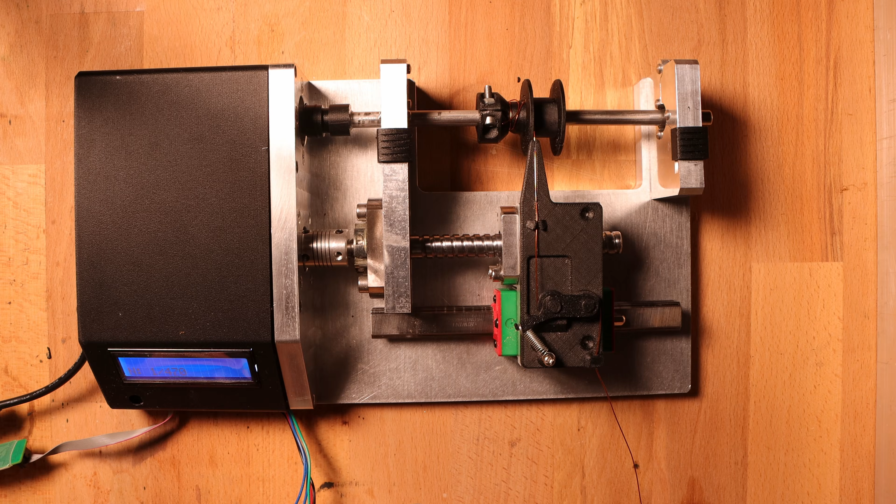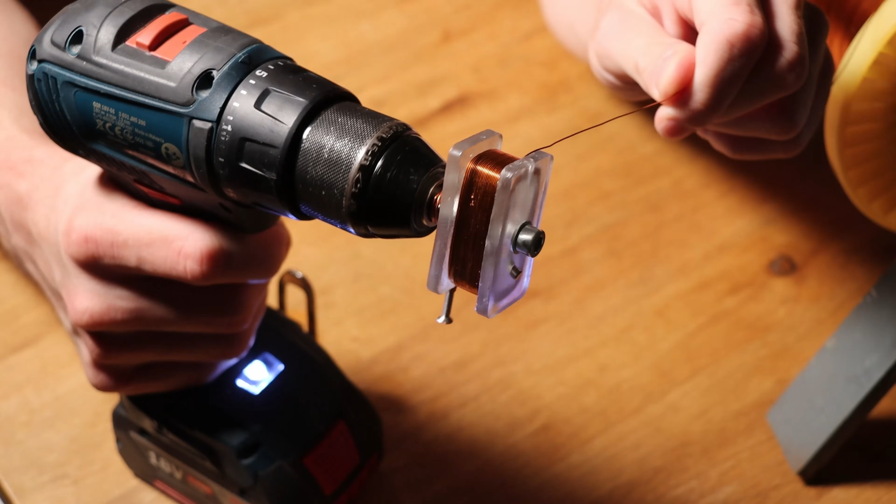I need coils. Not one, not two, many of them. For the first linear motor prototype I wound 3 by hand, which I remember as a truly traumatic experience. That really was a pain in the... So I did what any sane engineer would do. I built a machine.

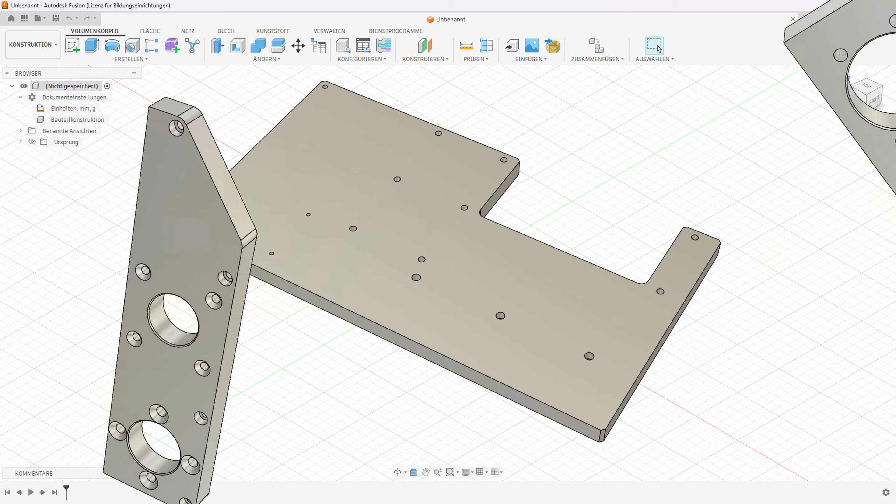As always, every project starts with a concept. A base plate, holders, a spindle, traverse, motors, ball screw, electronics and controls. And eventually, all those individual parts slowly turned into an actual machine. Let's make some chips.

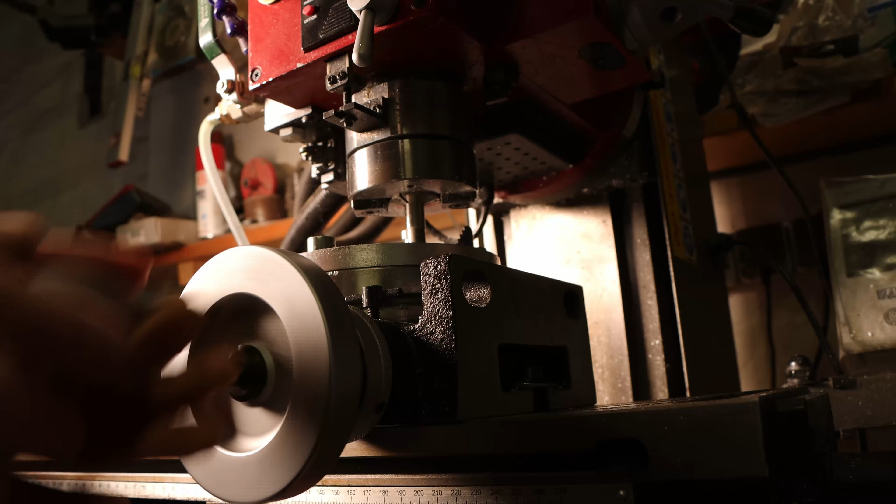But of course, where's the fun in not making chips? Which is slightly less fun when the garage is at -10°C. I decided to machine most of the parts myself, except the base plate and the motor mounts, to push my skills a bit further.

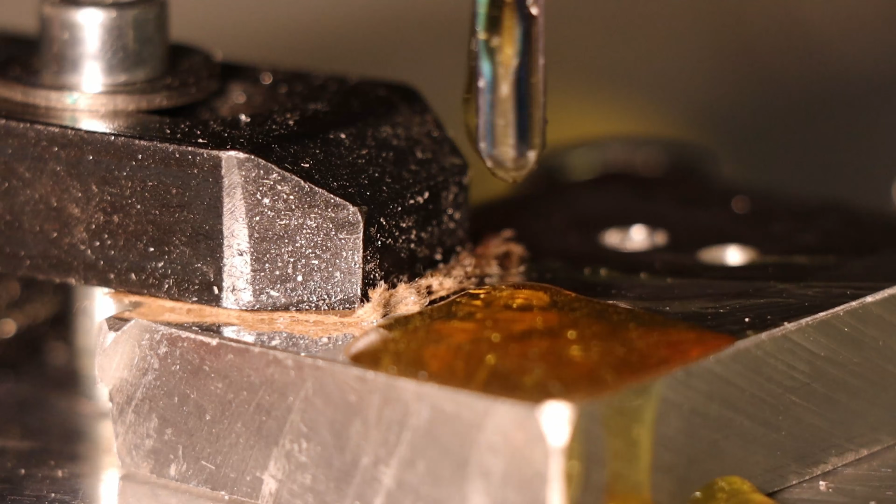Most of these parts are machined on the rotary table, and for this build I decided to make a sacrificial fixture plate. Each part has at least 2 key features, like external radii with a 5mm reamed hole in the center or a large bore. These reamed holes make positioning and flipping parts quick and repeatable. And once a part is done, I just resurface the fixture and move on to the next one. Wait for this shot, this is oddly satisfying.

Alright, first part done, 4 more to go. But first, resurfacing.

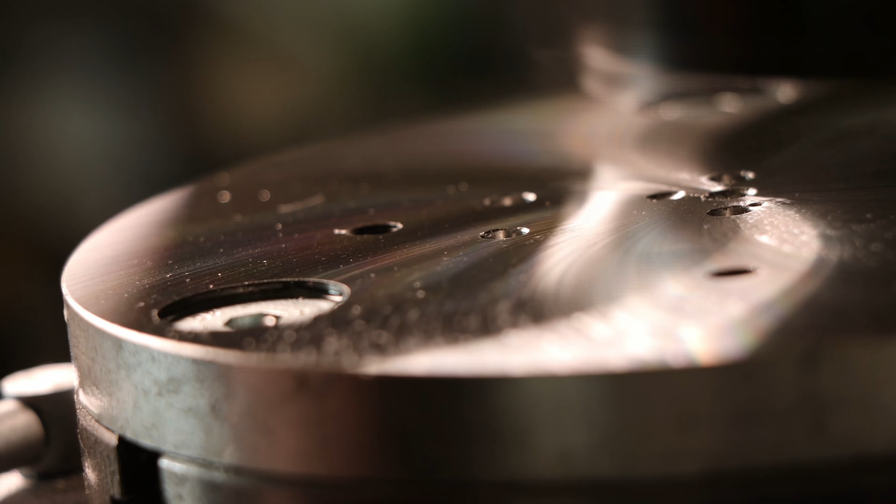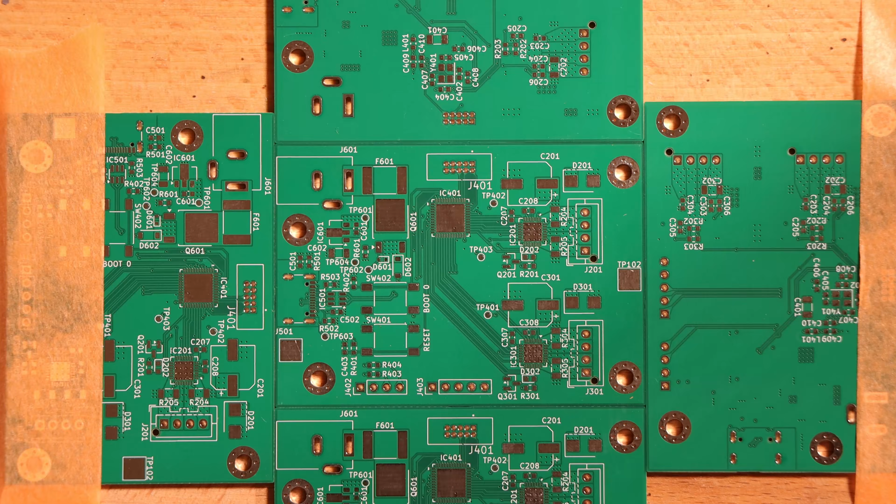Since it's been a while, I decided to design a proper PCB for this project. Via a simple UI, you simply set the parameters for the winding job and hit start. The microcontroller then pre-calculates the speed ramps, couples the traverse to the spindle, and sends the right pulses to the TMC2209 stepper drivers and motors.

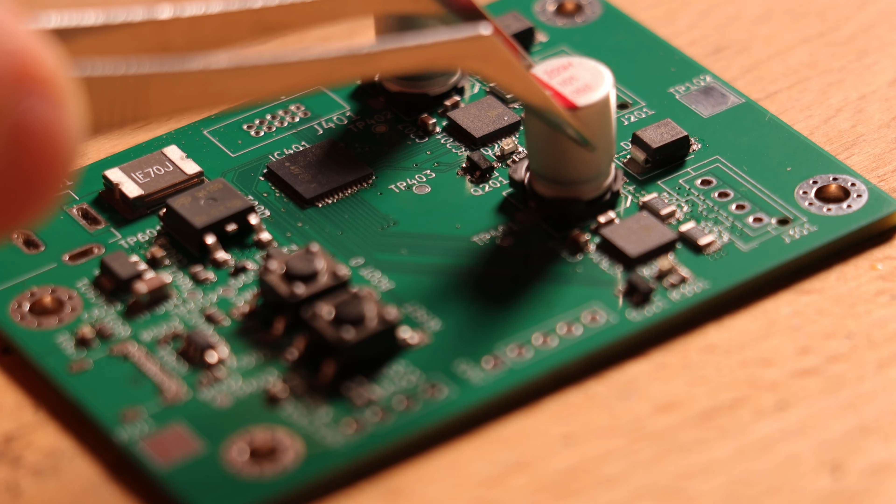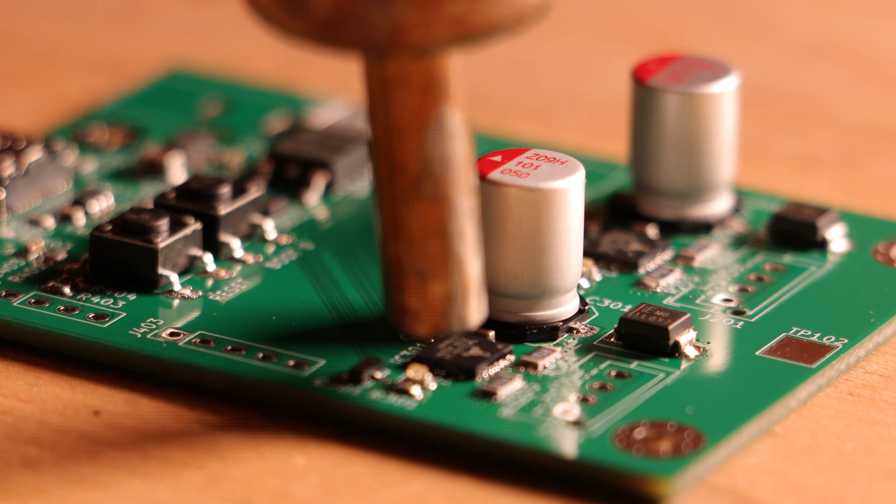Of course, I made some mistakes when designing the circuit board: forgot the USB D+ and one-wire pull-up, didn't debounce the encoder and the button, no test points, and the used controller doesn't feature USB DFU when blank. Besides that, everything works perfectly. Now all of the parts are finished, we can start with the assembly.

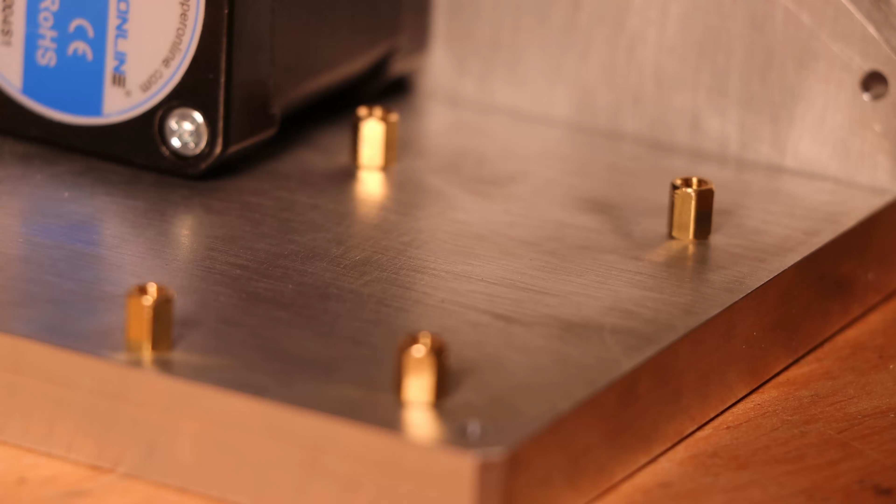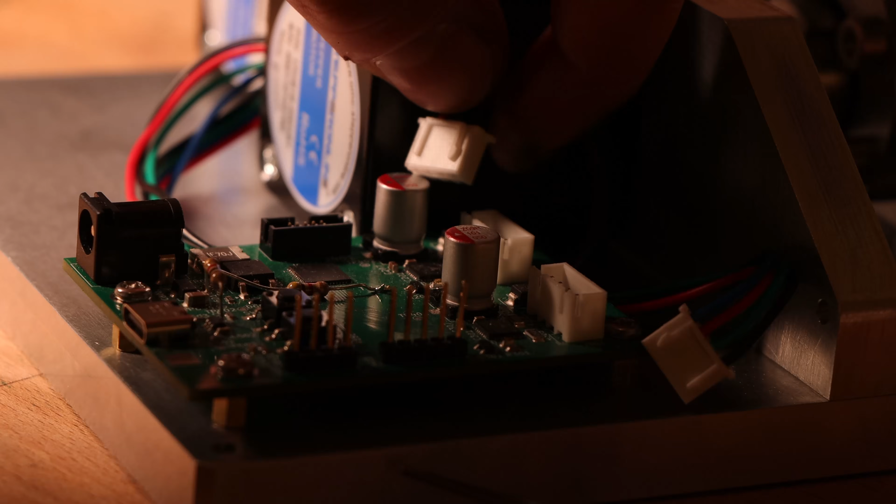Now, we need a program, but before that, we need to know how to wind a spool. Sounds simple enough, but there's a bit we should consider. Most people know helical coils, and if you ever wound one yourself, you know at some point it just goes completely off the rails, no matter how hard you try. According to Wikipedia, this drops the fill factor to about 73%. What we wanna do instead is an orthocyclic winding.

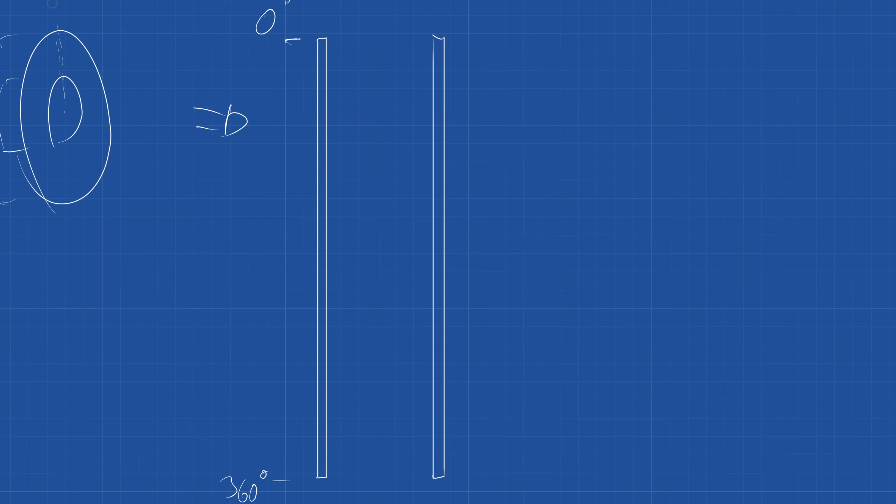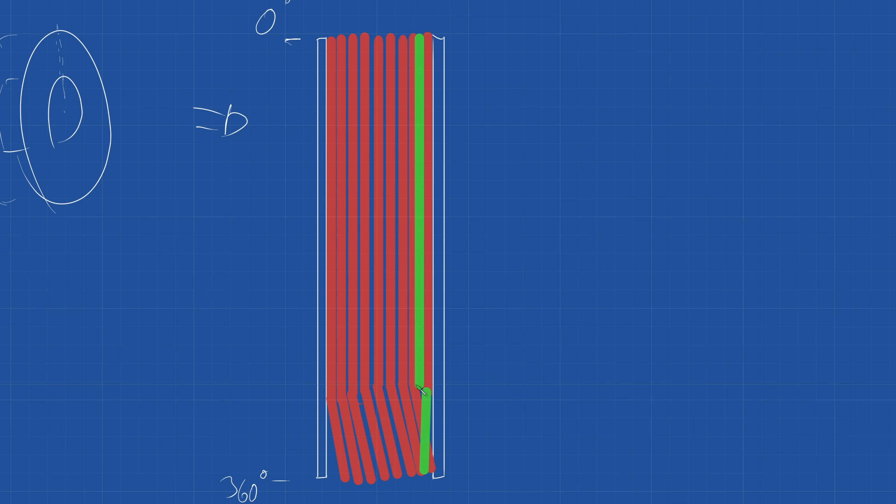Orthocyclic winding. In a section view, it looks like a honeycomb. To understand what is going on here, let's unwrap the winding. Every turn is parallel to the others, no matter which layer or which direction we're winding in. Each turn crosses over only at one transition point. And also in this area, the layers cross, in theory.

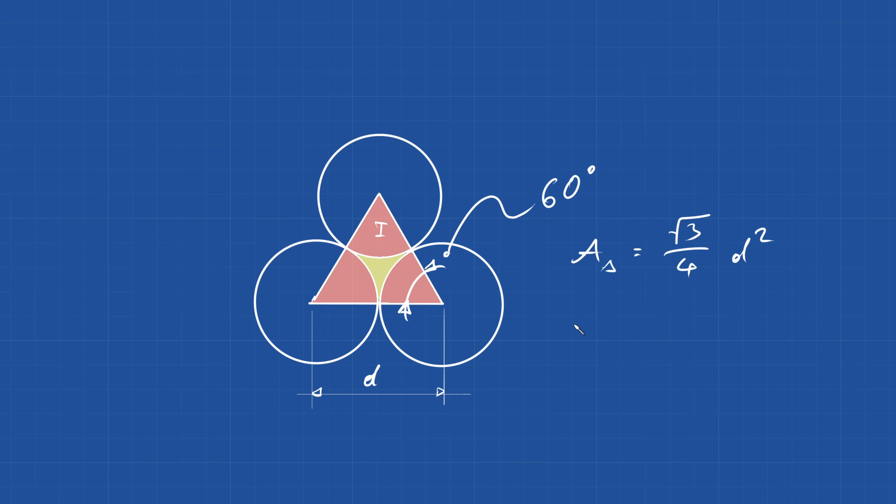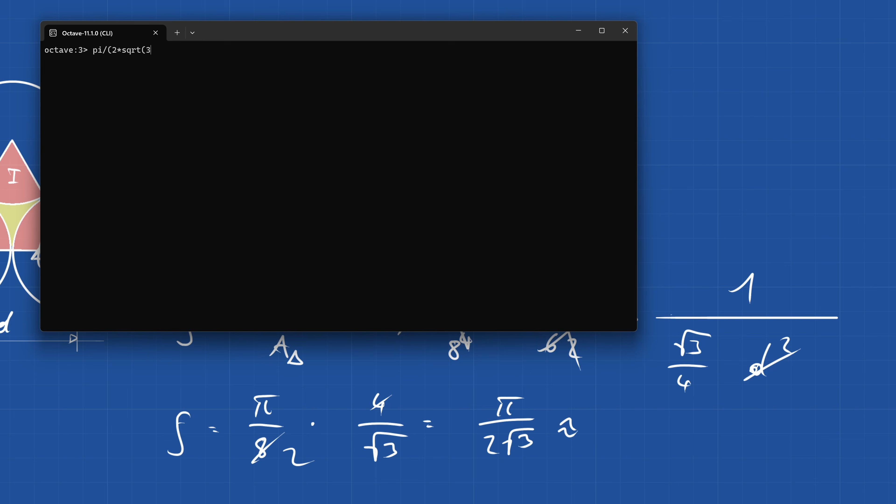As a result, every turn sits in the valley of the previous layer. That increases the fill factor to the theoretical maximum for round wire. That's about 15% more copper per coil, compared to a normal one. That's what we're attempting. And there we go. 3, 2, 1.

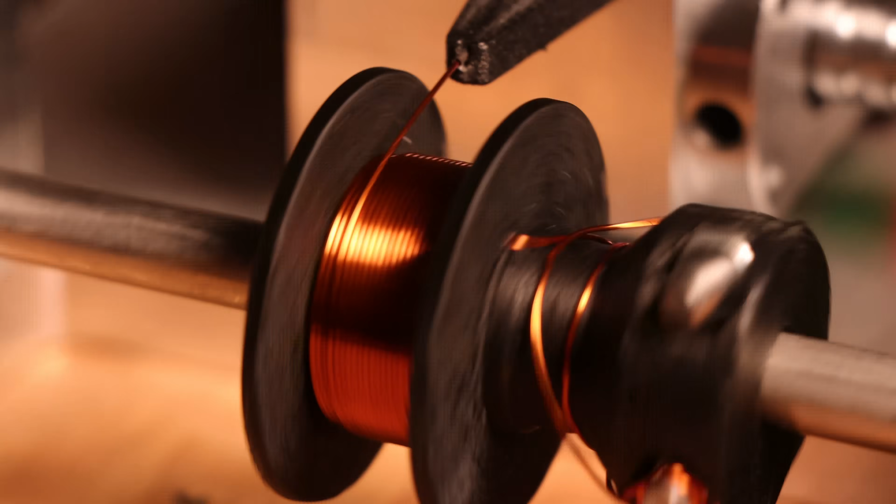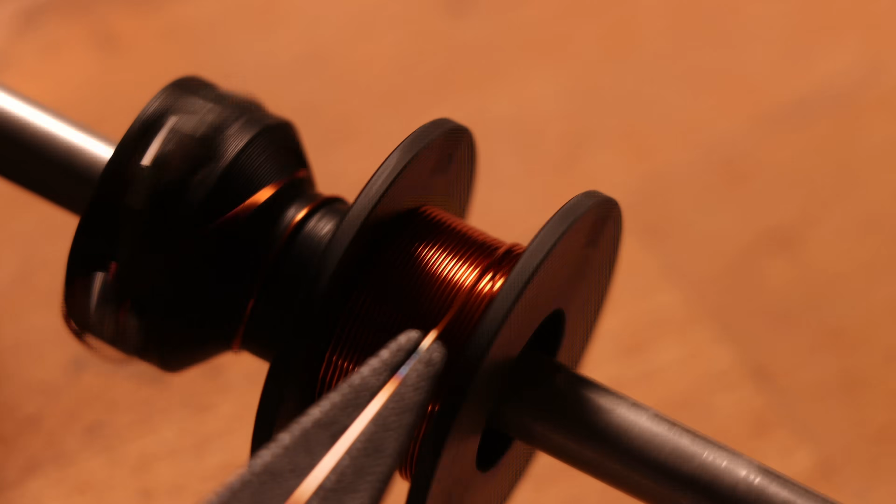And somehow, after all the redesigns, broken tools, firmware bugs and frozen fingers, it actually works. Kind of. At some point, the wire jumps over a valley and messes up the winding. I guess there's a small bug in the program which causes that. And maybe the wire should be tensioned more.